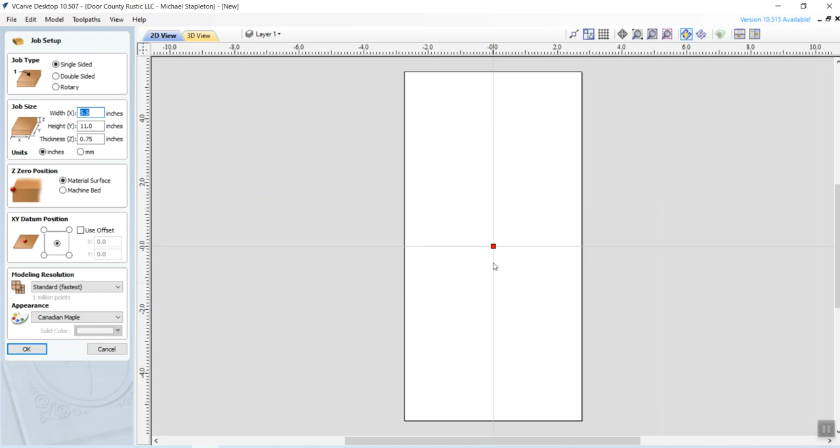Okay, so in this one, I'm going to import a file from SketchUp and then create the toolpaths for it. So I hit on new. It was set up already with a width of 5.5, a height of 11, and a thickness of 0.75. That's what I use for most of my templates, and those are going to be run on PVC, which has a lot to do with the speed and the number of passes.

So it basically now has that. I'm going to go up to import vectors, and I should have a file out there somewhere. Give me a second. So there it is. I saved it with a Vcarve name at the end because that way I know it's a SketchUp 2017 file. So I'm going to double click on that.

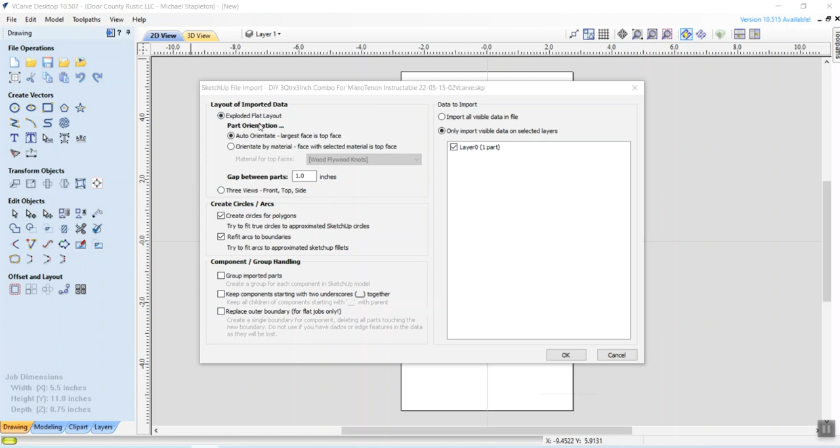Okay, so then this always pops up. If you're interested, you can pause and take a look at what settings I have here, because I don't even know how I got there. It was just time, trial and error to get to that point. So I'm going to say okay.

It always comes in a little bit off center. I don't know why, but I'm comfortable with that. I just go to Align Selected Objects right there, go to the center one, and it centers it for me. I close that out. So now I have everything that I need for doing the toolpaths.

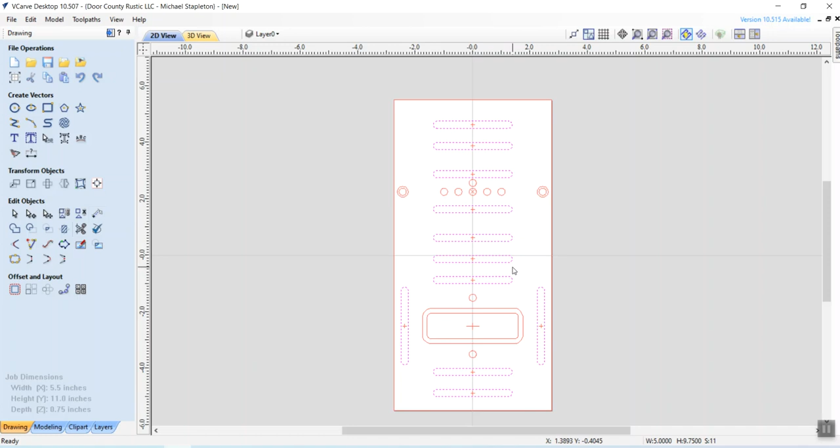So on this one, what I'm going to do is select Control, then Shift Select. It's always the opposite of SketchUp, but Shift Select, Shift Select, and then double checking to make sure that all of them are selected, which they are. I didn't do it by selecting an area because I didn't want to gather these in it.

So this one, I'm going to go to the pocket toolpath. I want those to go full through at 0.75. Do I need 6 passes? No, I do not in PVC. I just wouldn't want to change this and run it on hardwood or something, but I'm going to change it to 3 passes.

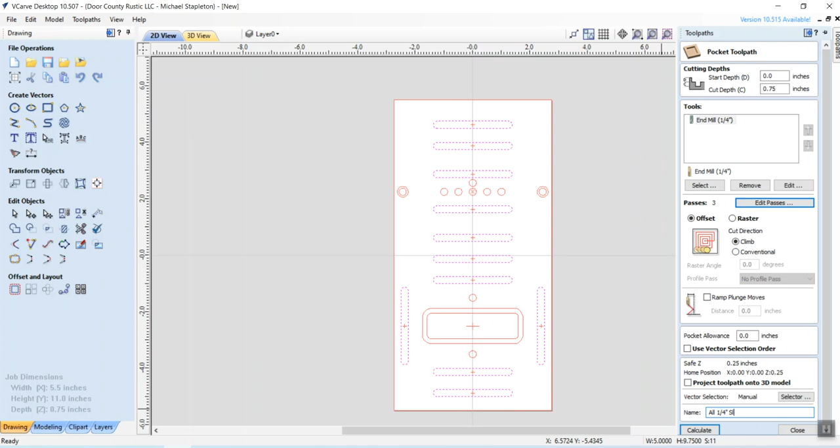And then I'm going to title it all 1/4 inch slots. These are for the Plywood Guides that we can use to help us align. Now when I do that, it shows that. I don't do the test right away; instead what I'm going to do is go to zoom, and I want to start zooming in on a few things like the halfway point, because I can always use that to slide it around.

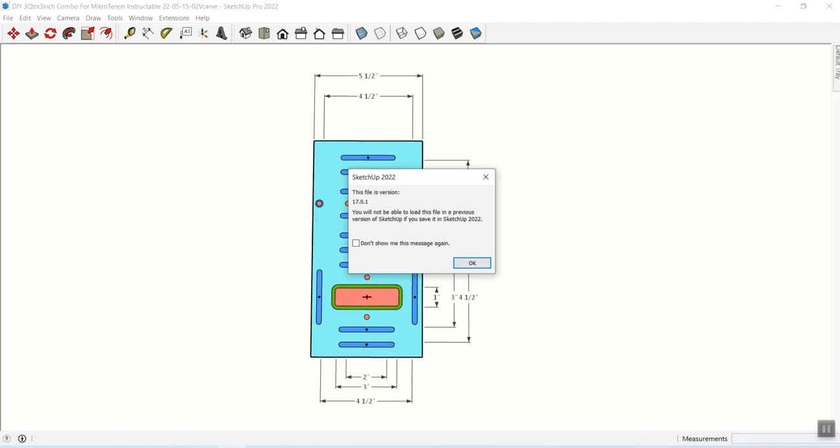So now what I want to do is my 1/4 inch holes, my full throughs, and if I look at the SketchUp file, I see that I have the reddish colored ones, right? And that means that they're full through. And then I've got these blue surrounds.

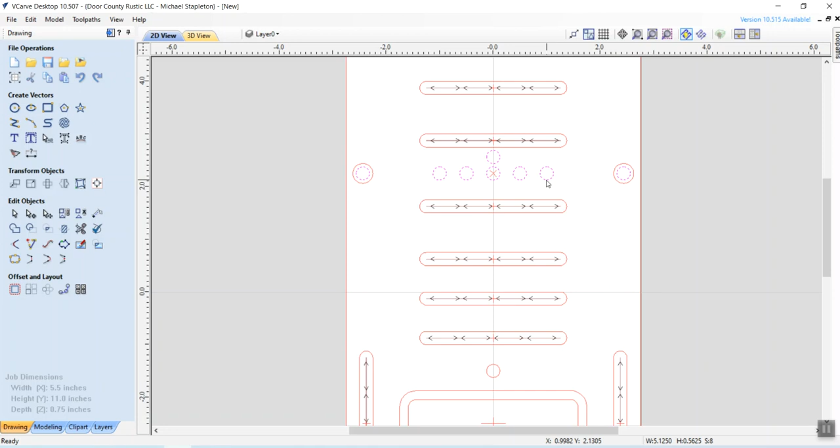So when I go over to Vcarve, I know that inside there, and again shift click - that's my peephole right there. Then here are the 5 holes that are going to be used for the hinge bits to make the dimples. So I've got that, and now I can keep that going down. This is a peephole as well, and that's a peephole. And because those are all 1/4 inch holes, the router has a 1/4 inch up spiral, so it can just go straight down like a drill bit.

It doesn't need to go down and around, so because of that, I can change the number of passes. I am going to again do the pocket toolpath. It's going to go 0.75 deep. It defaults to 6 passes, and that I can just change to 1. If it was hardwood, then I would want to probably go do 2 or 3, but you don't have to go to 6 for sure.

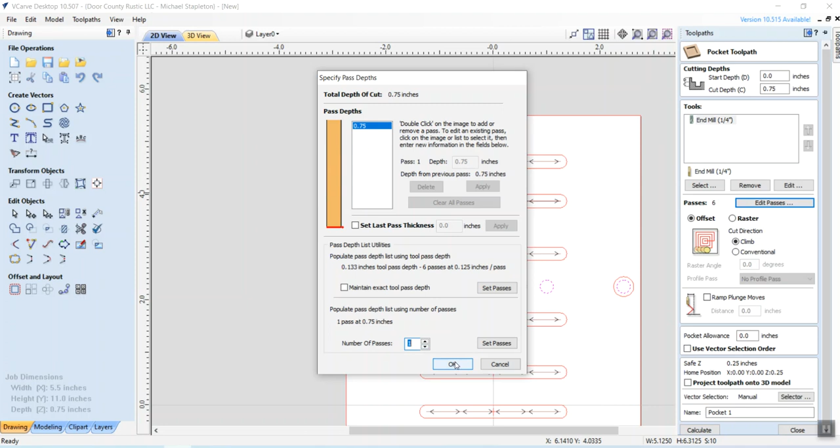And then I'm going to go down here and say all 1/4 inch full through, something like that. Calculate. It wants to jump over there and show you that. I'm going back to 2D view. Now I have to just remember what I did and what I didn't do.

Okay, so I'm going to click somewhere right in here. That unselects all those. Now I want to do these outer rims right here, that one. And these are for the 3/8 inch dowels that are basically going to be used to help with alignment on different cases. On the other one I had a whole bunch of them, but this one I only have the 2.

So I'm going to go up here, and this time I'm going to use this one, the profile toolpath, and I'm going to go down a 1/2 inch, 0.5, which is enough that I can put the dowel in there. The reason I have the 1/4 inch is sometimes the dowels get stuck in there. They're kind of hard to get out. So if I go around to the other side, there's a 1/4 inch hole, and I can just push them right out with like a 1/4 inch dowel or something.

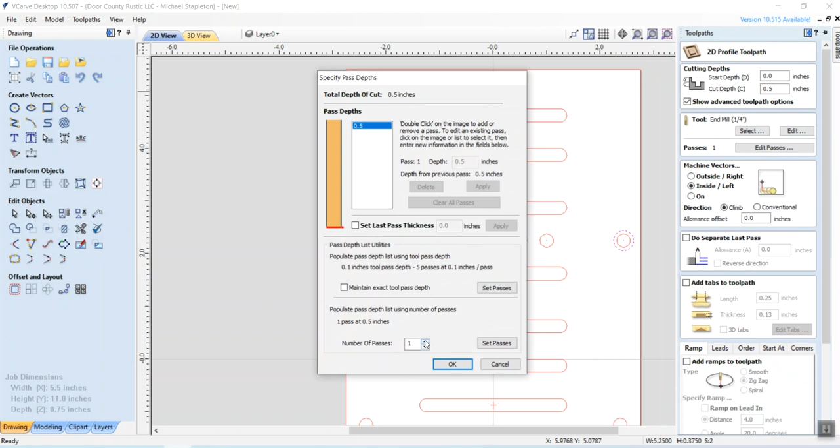And again, I'm only going down a 1/2 inch, and the hole is mostly already there. So I certainly don't need 5 passes. And in fact, 1 pass will be plenty, because it's just going to go in there and make one swing around. It's going to make it a 1/2 inch deep. You know, maybe I'll go 2 passes on that. So let's just switch that to 2, because that's quite a bit, a 1/2 inch. So now I've got 2 passes, good to go on that.

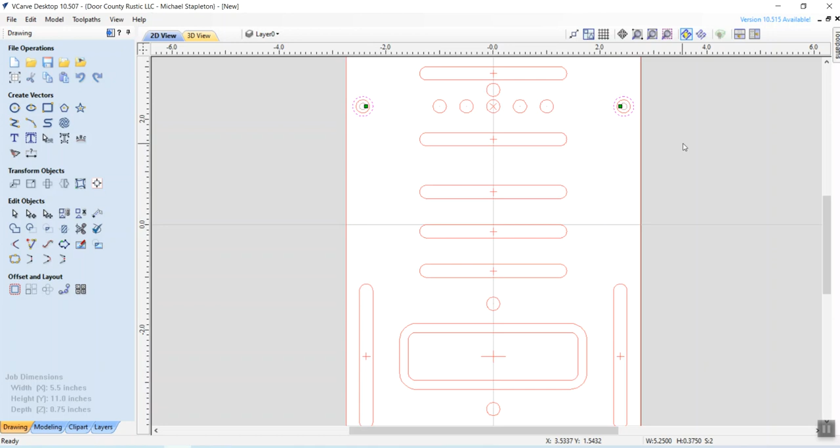You have to scroll down a little further on that, and then I'm just going to type in, call it outer rim for 3/8 peg. Good enough. Calculate. All right. Now I think I have everything. If I just kind of look, I got all of the slots, yes. I have all the full through holes, yes. I have the rim, yes.

That's good. Okay, now I go to Tool Paths, and I'm going to unclick that and then re-click it. Now I should have everything there. I'm going to go to my 3D view, and there's what it's telling me it's going to do. And it's certainly worth the time to do preview visible toolpaths. I don't preview all because sometimes I'll have other toolpaths down there that I'm not using on one run, and then I'll use it on another. They're there, but I don't use them. So I want the visible toolpaths, which are the ones that I've selected right here.

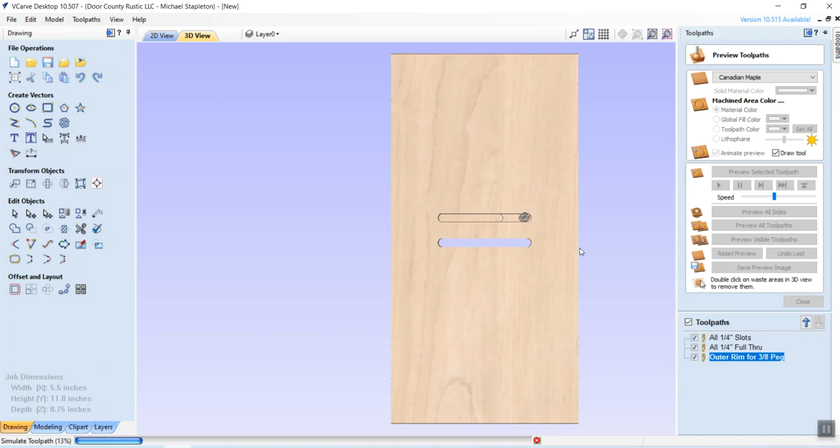So click on those, and that was pretty fast, right? So let's just go ahead and reset the preview. I'll take the speed, drop it down a little bit, and then I have to reselect all those, and now I'm going to say preview visible toolpaths, and that's more like it in terms of what the router is going to do. This is almost too slow, so I'll just speed it up a little bit, and there we go. It's making those slots. I'm not doing that. The system is, right? The software.

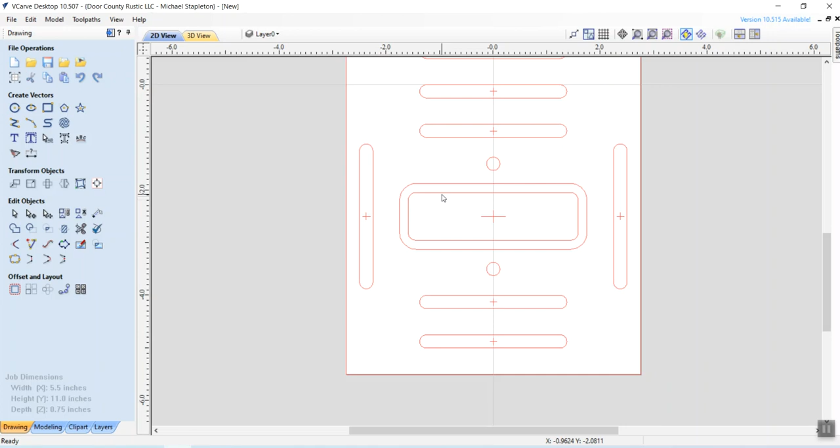So now it does look like I've got everything, but guess what? I don't have right here, right? And so you're almost thinking I did that accidentally, but I didn't. What I did is I had never done the mortise part. So what I want to do is there's a 2-stage on that one as well. So the inner part is going to be for mortising with the router bit, and that one needs to be full through.

So what I want to do on that, I could do this method where you do this thing and then you do the tabs, but it does not work out very well on this. Because there's going to be a router guide going along there, I don't want it hitting the remainder, like these little bumps, the tabs that it leaves. So I don't do that. Instead, let me see, how do I get over to the other one? All right, so I'm going to use this one.

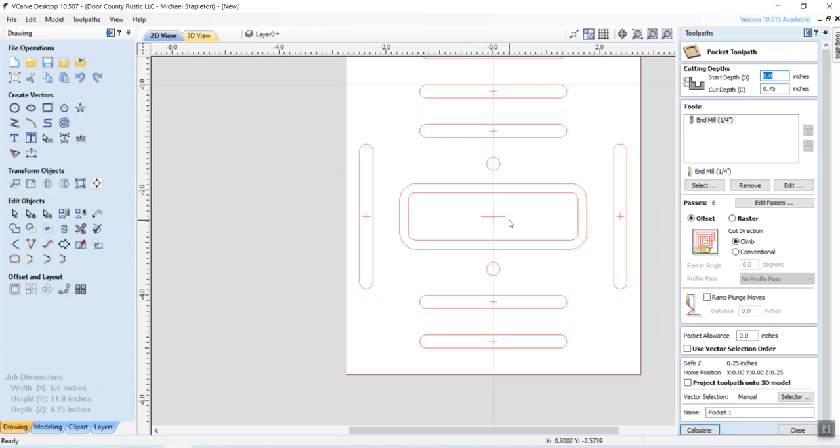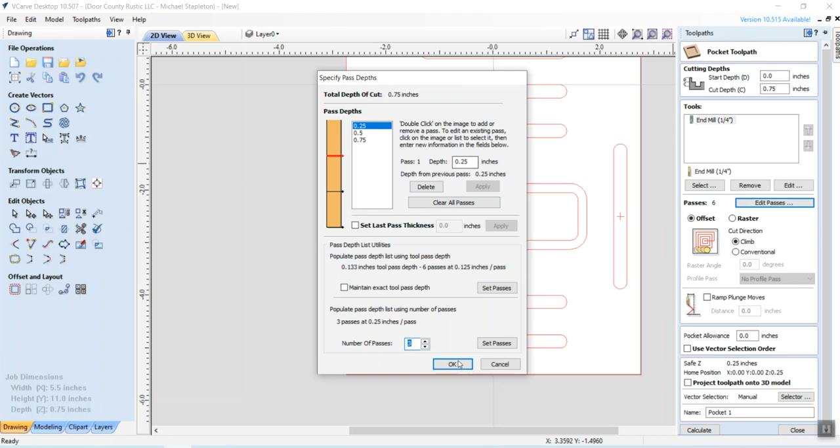It's going to take a little more work because it has to go through a lot of passes, but I do want it to go the full 0.75. 6 passes, again, this is PVC, so no, I don't have to do that, and that would take a long, long time. So I'll go with 4 passes, which on a 0.75, in fact, it even tells you here is 0.1875. I can go to 3 passes, so 1/4 inch per pass in PVC, that's fine. And I've got that, and I'm going to call that router. Wouldn't you know it's something showing up there? What? Router?

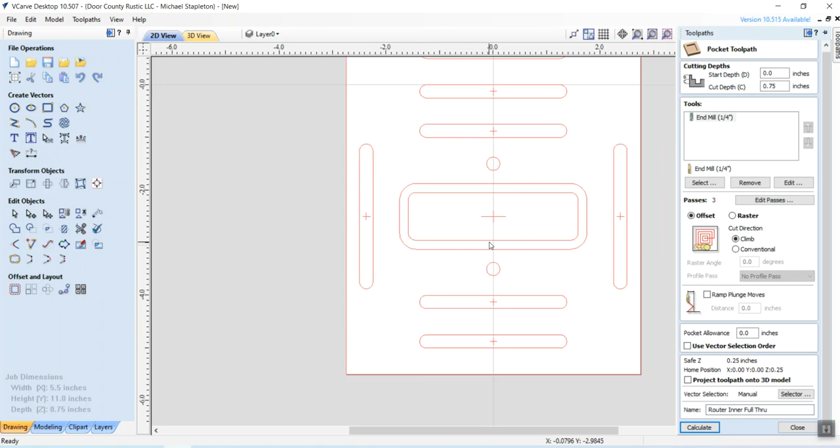Router, inner, full through, calculate. And something popped up on my screen. I don't know if I hit something or whatever, but it wasn't recognizing that. Okay, so now I've got it again. I've got my dotted line right there. I've got 0.75, I have my 3 passes, and I called it router inner full through, calculate. And again, now it's showing all those things it's going to do there.

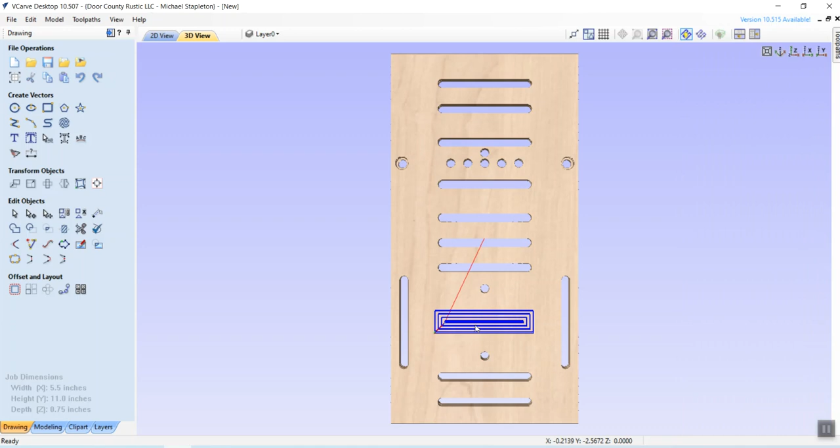But I also need to do the outside, and this has to do with something that I've discovered that really, really works well when routering, and that is to create a pocket for the dust. Because this is kind of throwing me off a little bit, I'm going to turn it off. I'm going to unclick that. There, that makes a little more sense. Now I see just the outer part, and I don't want to have the router do all this inside here because that's already gone. There is no material there.

Now you always want to make sure you keep the order here, because you don't want to do the outside first and then the inside, because that's possibly going to put too much pressure on that bit. Again, I want to do the same thing. I want a 1/2 inch trench, basically an area that dust can go to, and you'll see this when everything comes out. It's going down a 1/2 inch, but it's only taking off a little bit of meat and it's PVC, so I'm good with 2 passes at a 1/4 inch each.

And then I have to slide down to here and call it something. I'm going to call it router dust rim at 0.5. That just reminds me of how deep that's going to go.

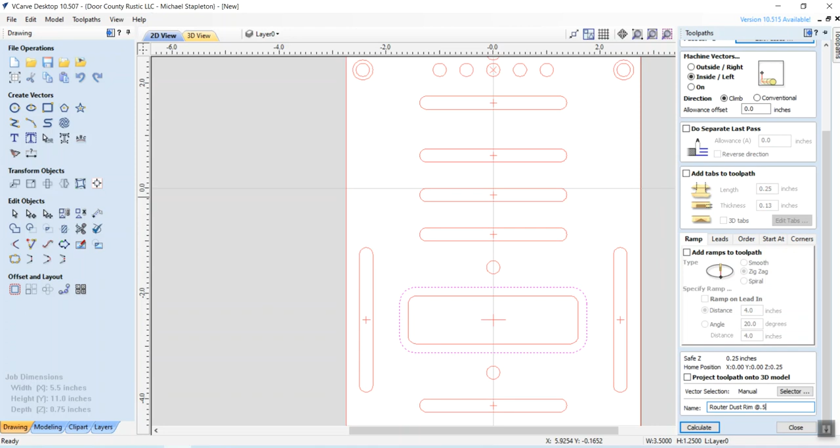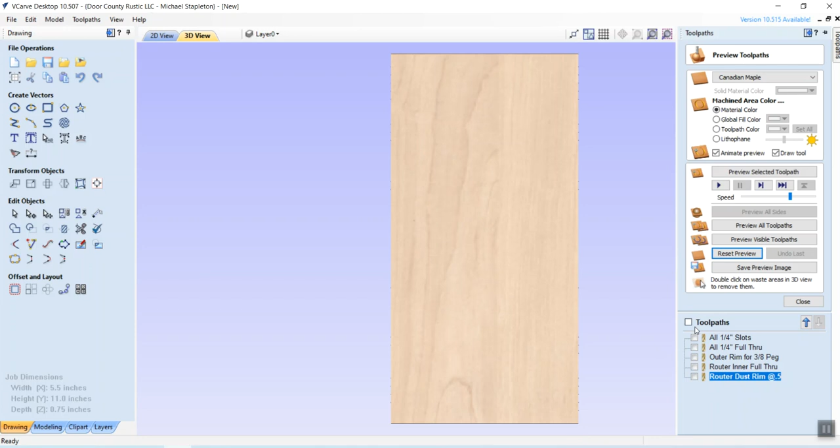Okay, so you can see that I'm going back to that 3D view, and I'm really glad I did the 3D view, because otherwise it would have been frustrating to go out to the shop, run it, and then it wouldn't have made this. So I'm going to unclick everything and reset the toolpath so I have a nice clean slate. I'm going to click on that, which selects everything here. Now I'm going to preview the visible toolpaths. I'm going to speed it up a little bit since we had already seen a lot of that. Now I'll try to slow it down.

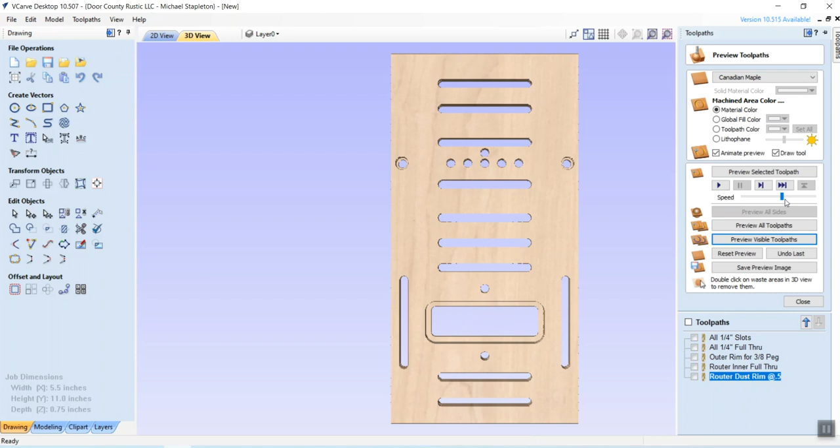What it's going to do now is the inside, and that's going to make, I think it was 4 passes. It's doing the inside. Now it's going to do the outside. There we go. And this is what I'm looking for on my template. Now I need to click on that so I have them all. Go to close. I go to save toolpath, click on this save toolpath, and I have to decide where to save it.

I have a folder set up for MikroTenons. I think I saved it. Let me just double check. Save, and go to MikroTenons. And I really want to call this DIY 3. You can't use slashes because it's a file name. So 3QTR by 3-inch MikroTenon jig, and that's good enough.

And then I also want to save the Vcarve file, so same thing, save as, and then I'll go down to MikroTenons and call it the same thing. So I gave it the same file name, but it'll change to the CRV. So now those 2 files are out there and they're ready, and they will be on the Instructable for download, so that if you do have Vcarve, you can pull that in.

So everything is all set to go on this, and now what I'm going to really end up doing is going down to my folder. I'll do a copy, and then I place it onto a thumb drive, and that way I take the thumb drive out to the shop, and that's what I end up using for the CNC. So there we go.